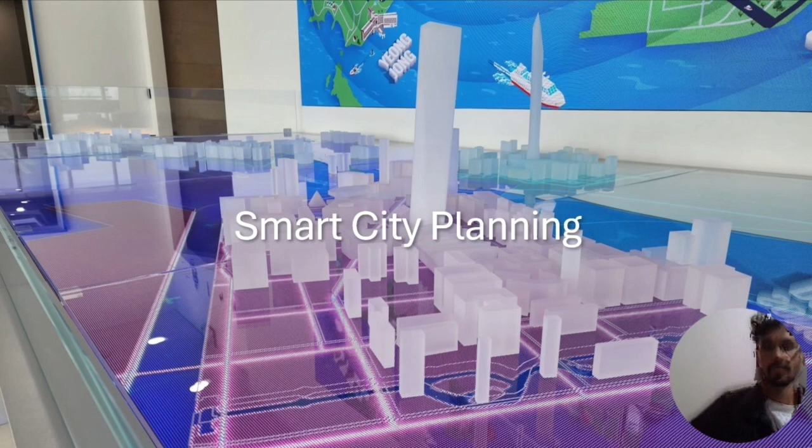In this slide appears a 3D modeled, illuminated city model, likely a conceptual or scale model of an urban development project by IFEZ.

On the 9th of July, we visited Ajou University. We explored Korea's ancient history, from its early kingdoms and dynasties to the traditions of family and clan naming that remain significant today. The following day, we also learned about Korean charm, traditional Korean history, and wartime stories, gaining insight into beliefs, resilience, and values that have shaped Korean identity. Together, this session gave us a deeper cultural understanding that enriched the rest of the journey.

On the 9th of July, we visited the Samsung Innovation Museum. Here we learned about the history of electricity, lighting, and telecommunication through physics knowledge. We also explored the inventions that paved the way for how modern electronics work, and then moved to Samsung's innovations from the 1970s to this very day, showing the role of innovation that shaped everyday life and the global economy today.

After visiting Samsung Innovation, we went to the Science Museum as well that day.

On the 11th of July, we visited SKKU, the Advanced Institute of Nanotechnology. We had a lecture presented by Professor Chungseok Choi, a nanotechnology professor.

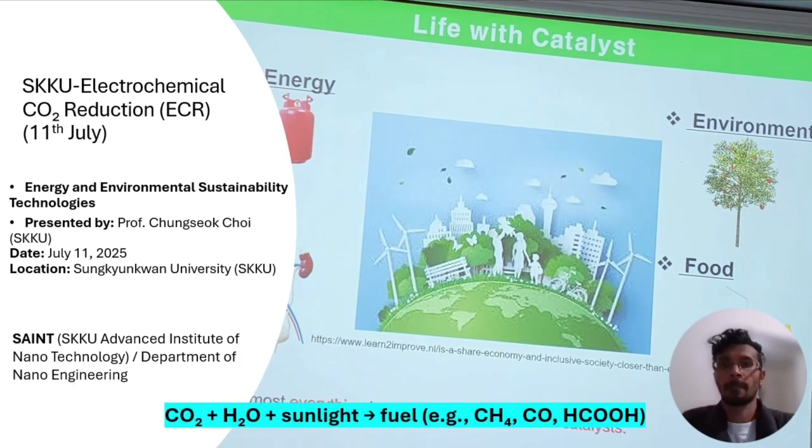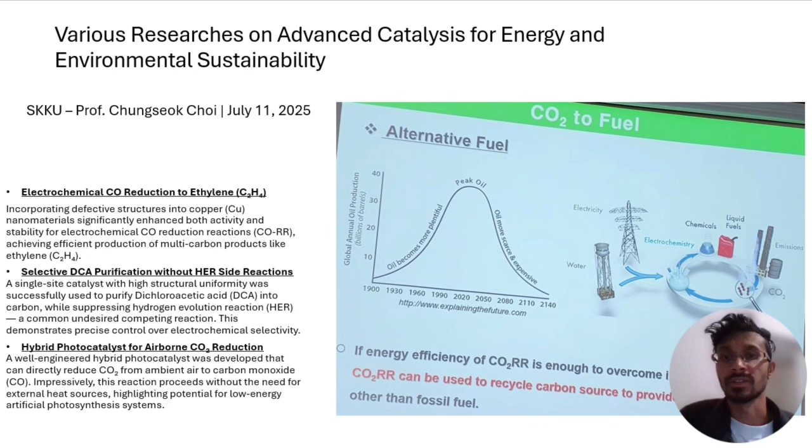In his lecture, he showed us how to convert carbon dioxide into chemicals or hydrocarbon fuels using nanotechnology electrocatalysts. Dr. Choi showed us four different types of projects: electrochemical carbon dioxide reduction, photocatalysis for solar fuel, chlorinated organic pollutant degradation, and nanostructured catalysts.

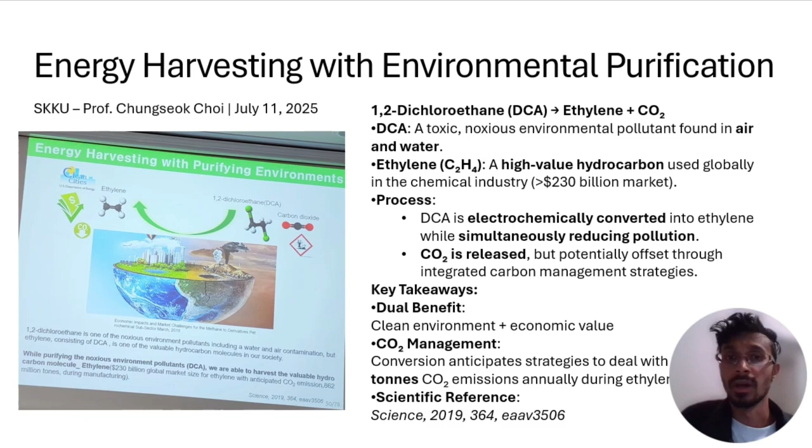All these catalysts are part of his sustainability project. In his project, he harvests ethylene using carbon toxic gas in the air, processing it and electrochemically converting CO2 into fuel as well. He showed us some different catalytic processes for capturing CO2 and hydrogen.

Next up is the Seoul Energy Dream Center, one of the most interesting highlights of our study tour in South Korea. The goal is energy independence and sustainability. It uses zero energy building technology that reduces energy demand by 70% through passive design strategy. The goal is independence, sustainability, minimizing energy use, maximizing renewables, and optimizing building systems.

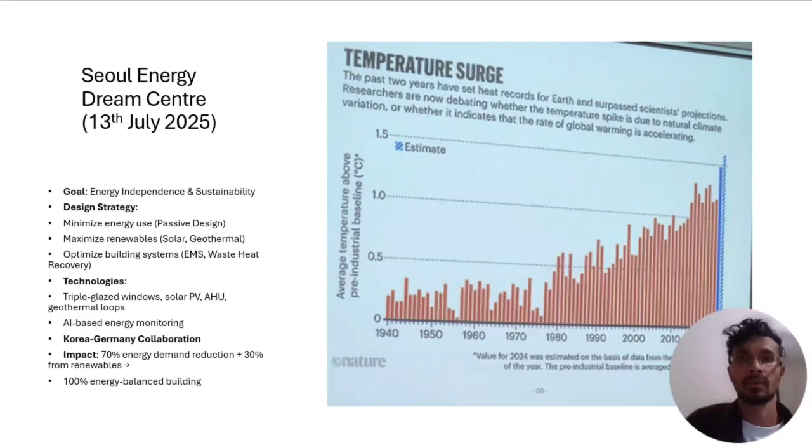Technology used in this building includes external Venetian blinds, triple glazed windows, light wells for daylight, edged angled walls to control solar gain, artificial granite to reflect heat, and insulation rock wool backbone.

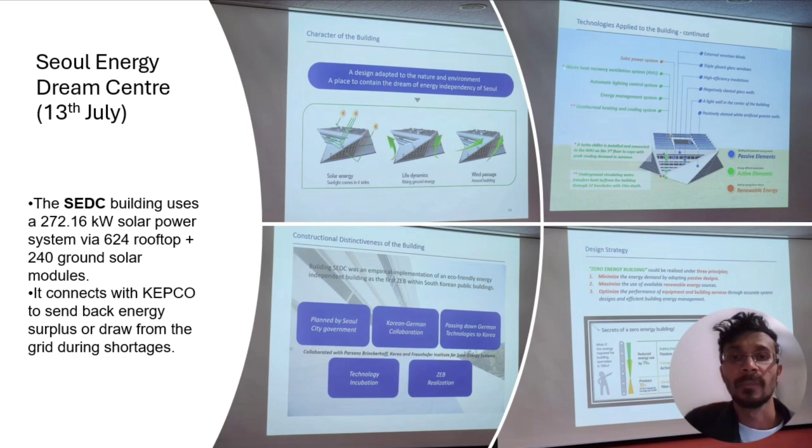Now in this building, here is an active side of Dream Center Energy Design. The building uses an advanced ground source heat pump system connected to dozens of geothermal boreholes, tapping into Earth's stable underground temperature to heat or cool water efficiently. Heat pumps, exchangers, buffer tanks, and chillers work in a looped system to deliver temperature-controlled air and water across different zones.

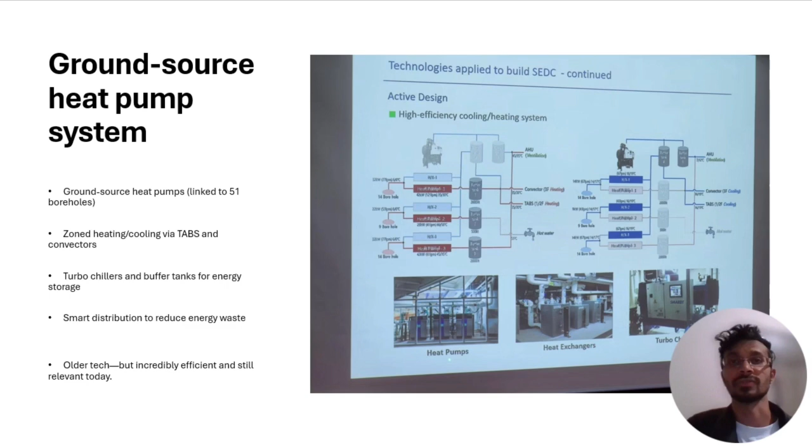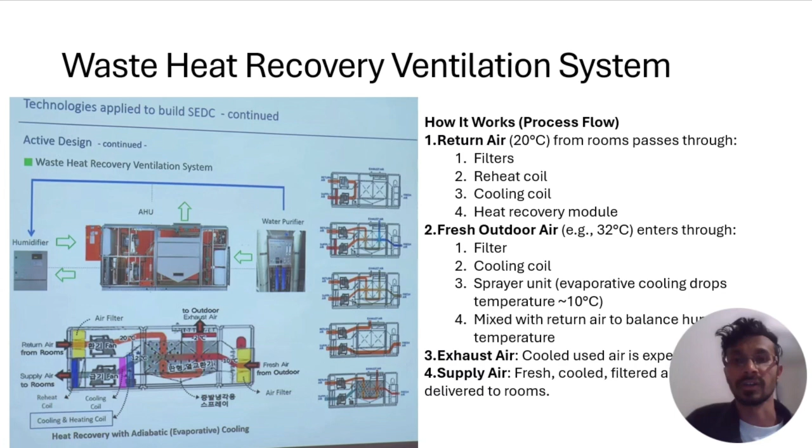Next up is Mosslab, and in this tour we learned about how biotechnology, sustainability, and smart design worked together, combining fused technology.

The core innovation is using mass cultivated moss as a natural air filter, removing up to 90% of fine dust, 40% carbon dioxide, and 60% VOC, which is a very toxic gas, without needing water, light, or soil for up to 12 months. It's a game changing technology for urban indoor environments and a fantastic indoor air quality control system.

As I spoke in the other slide, moss removes pollutants very efficiently. It doesn't require any light, enduring no light for 12 months.

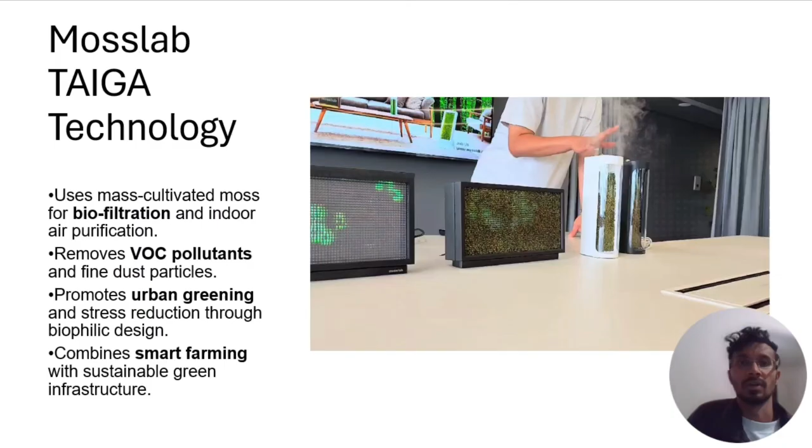Here you can see a video, and it's in work. There are different designs of product development for this technology as well.

Next up, on 15th July, we visited Embassy and the Hyundai Motor Studio. At the Embassy, we were introduced to opportunities for diplomacy, innovation, and education exchange between Australia and South Korea. At Hyundai Motor Studio in Goyang, we explored the hydrogen fuel cell system, besides other systems, and how different technologies Hyundai is developing through innovation.

At Hyundai Motor Studio Goyang, we visited and they showed this fuel cell technology in Hyundai. And in Busan, there was a big, significant tour we had at the BEXCO K-ICT Conference.

One of the projects was AI, circular economy, airborne objects and vessels - those kinds of technology they have been working on. Another very interesting one is the nuclear modular reactor, small modular reactors we visited, which are suitable for smart cities.

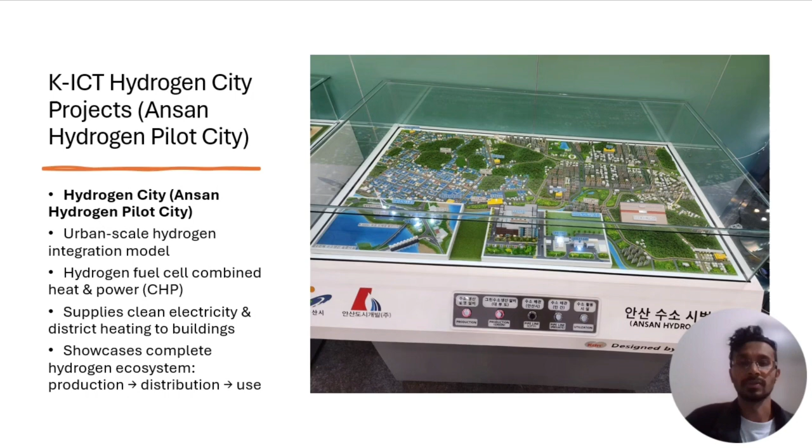The next one is the hydrogen pilot city, Ansan, where they're developing this technology. In this slide you can see the hydrogen pilot city, a massive city using hydrogen fuel cells and hydrogen technology, from production, distribution, and use.

Next up, we visited on 18th of July the Hyundai Ulsan plant tour and museum. They showed us different cars and the history of it. Then after that, we went to the manufacturing plant where we saw the process of the car in the assembly line.

We visited the next day after the day off on Saturday. On Sunday, we went to Ulsan Museum to explore further cultural heritage.

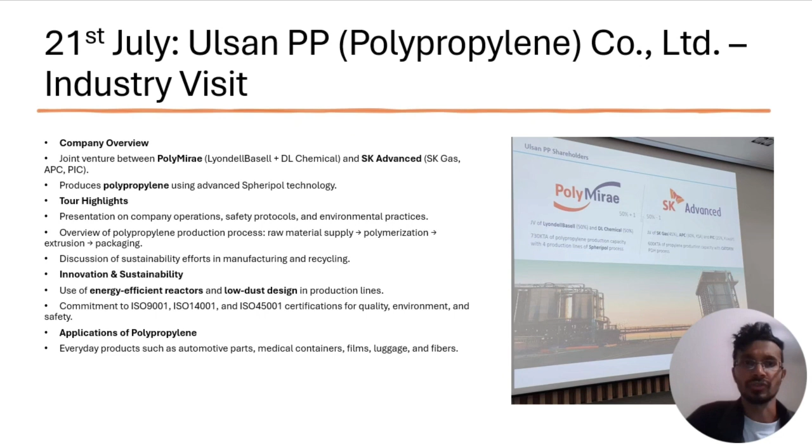On 21st July, we visited an important tour on polypropylene, where we learned how polypropylene is produced. Ulsan PP uses PolyMirae and SK Advanced technologies, and they also have innovation and sustainability projects. The presenter showed us how polypropylene is produced and the process.

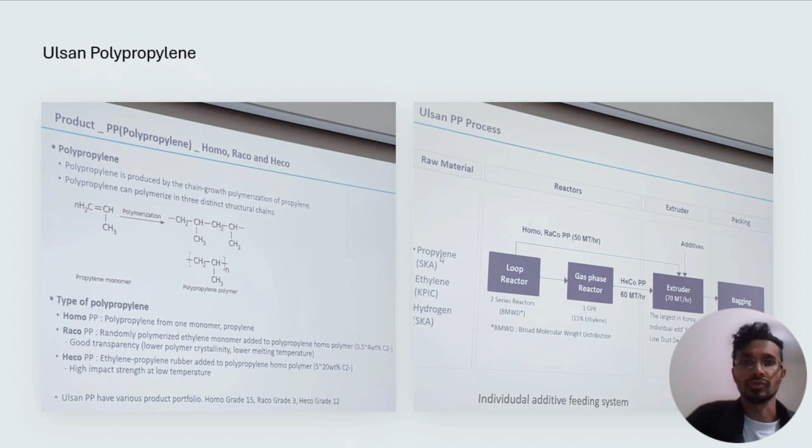This was our last day of industry visits, at POSCO Steelworks and POSTECH. POSCO focuses on manufacturing green steel through innovation in heavy industry technologies. POSTECH is a university-industry collaboration where startup incubators work closely with industry.

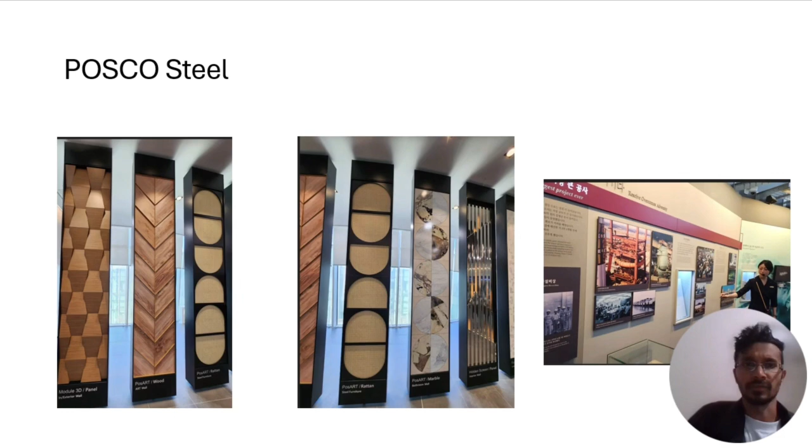This is the end of our great adventure tour. It has been such an insightful tour for us engineering students. As an electrical engineering student, I got to see a lot of different aspects of technologies in South Korea that we can bring to our university as well for different projects.